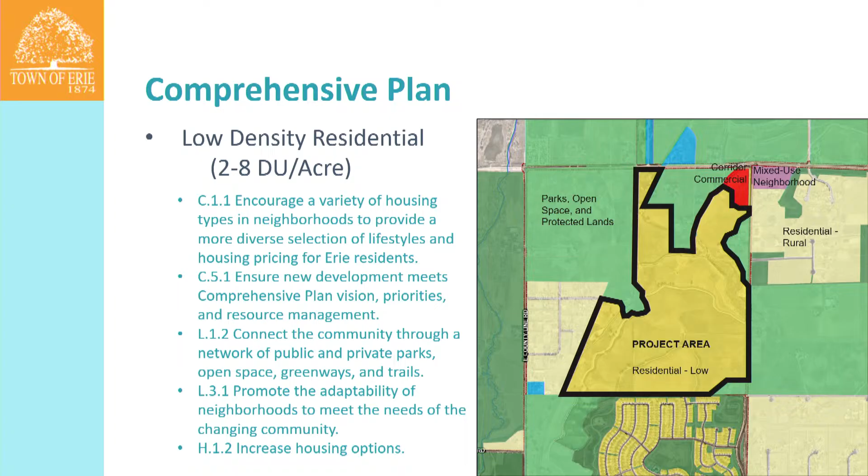Zoning-wise, as I mentioned, the zoning here is specific to Spring Hill PD. However, that zoning is fairly comparable to a low density residential type zoning.

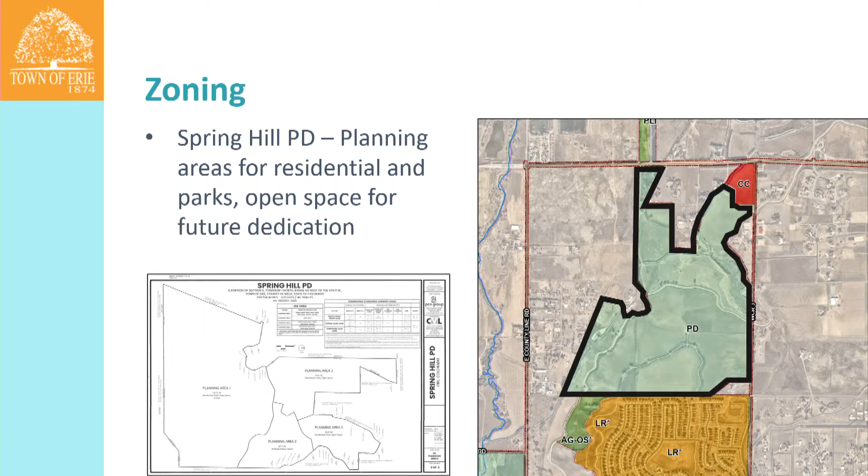Let's go over some of the key facts here. This is 300 acres total, 632 lots, breaking down into 414 single family detached, 148 duplex, and 70 townhome lots. The minimum lot sizes from the Spring Hill PD are just shy of 5,000 square feet for single family dwellings, just shy of 2,000 for duplex, and just shy of 1,500 for townhomes. These lots are consistent with those lot standards from the PD. The gross density here is just over 2 dwelling units per acre.

There are a lot of tracts here, and those tracts serve a variety of purposes including utilities. Some are for open space, some are alleyways, landscaping, and drainage, among other things.

In total, there's about 44 acres of new public right-of-way that will be dedicated. This proposal also includes a school site, a future dedication to SVVSD, just shy of 11 acres.

In total, 35 acres of public open space would be dedicated. There's also a significant amount of open space anticipated to remain in private ownership by the Metro District out here, and that's 162 acres total open space, including private and public.

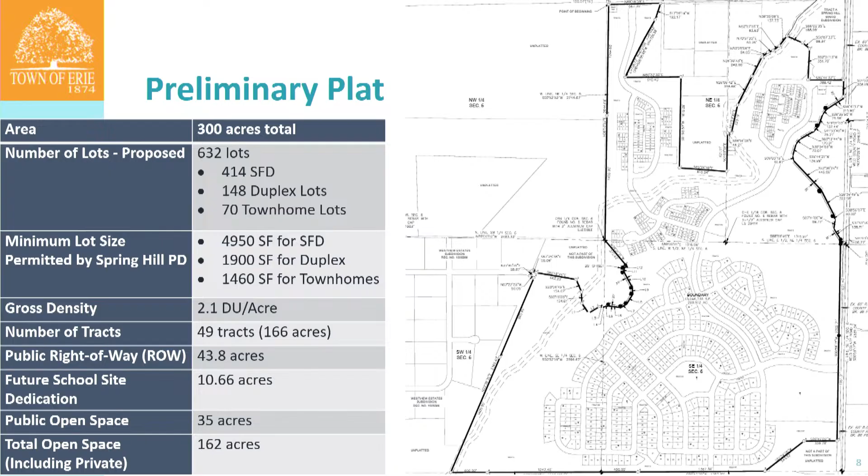In terms of access and roadways, there will of course be this new internal network of public streets dedicated as public right-of-way. Let me flip to the next slide. Key connections here - you see there will be one connection to Highway 52 to the north, and the traffic study suggests this will require some improvement.

Initially the thought was a traffic signal. I believe conversations with CDOT are ongoing - it could be a roundabout instead. I think the applicant can talk about that a little more.

The circle here is a nearby regional intersection, or off-site intersection, at Highway 52 and Weld County Road 3, which is currently stop sign controlled. That is planned, in alignment with CDOT plans, to become a future roundabout.

Developer contributions to that improvement would be worked out and negotiated through the development agreement at the final plat stage. There are also 2 planned connections to Weld County Road 3 on the east side, planned to be stop sign controlled and full movement. And there is one planned connection to the south down into Morgan Hill.

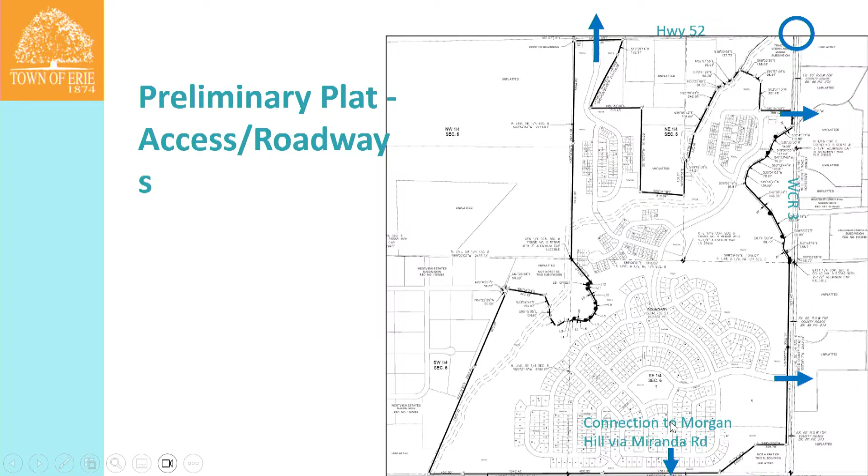Let me just make sure I didn't miss anything on this previous slide. Okay.

In terms of parks, trails, and open space, the applicant is exceeding the minimum required dedication for pocket parks. As you're probably aware, there's already the Morgan Hill Neighborhood Park to the south here. Our Parks and Open Space team determined that a new dedication of another neighborhood park was not desirable or needed, and instead fee in lieu would be the best way to proceed.

That fee in lieu would be collected at final plat. Community parks are always collected via impact fees. Open space, as mentioned, the public dedication will be just over 35 acres, and there is also a significant amount of private open space that would be preserved out here as well.

This map is probably a little hard to see on your screens. The pink line here is the extension of Spine Trail, which follows the perimeter. There are also a number of drainage and irrigation ditches out here that will remain, and the trail will be parallel to the ditch in a lot of these cases - that's part of the curvature you see there.

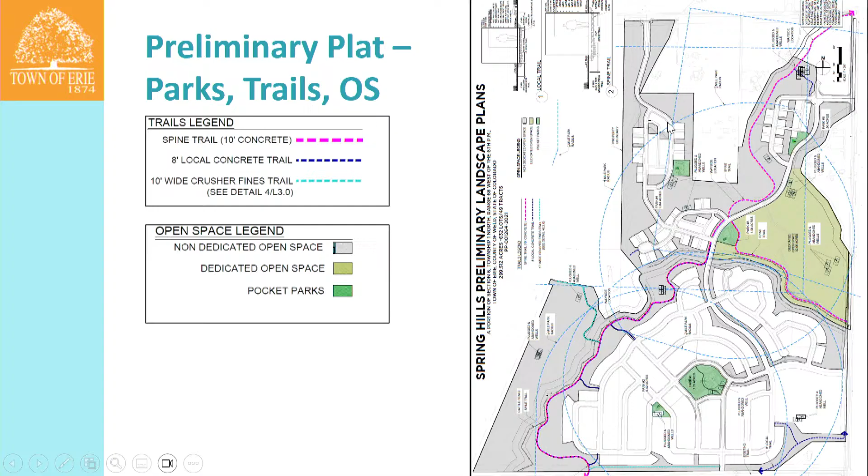There are oil and gas facilities out here, all of which have been plugged and abandoned. This application has been in the works for quite a while - it originally came in in 2021. So legally, they're obligated to abide by the oil and gas standards that were in place at the time they first filed their application.

This map is probably hard to see at this scale, but the shaded yellow boxes reflect our current standard, which would be a 50 by 100 box. That's meant to show that the setback applicable from 2021 would be a 25-foot setback from plugged and abandoned facilities. However, in most of these situations, a 50 by 100 setback would also work, because many of these facilities are at the perimeter of the developed area, in open space, or in some cases roadways.

There is some ongoing mitigation work in the northeast corner of the property. The applicant can talk about that as well, but they've been working with the state agency COGCC on cleanup because some soil contamination was identified. That would need to be completed before approval of the final plat. The arrangement of lots in that northeast corner is planned in a way to allow plenty of room for that mitigation work to happen.

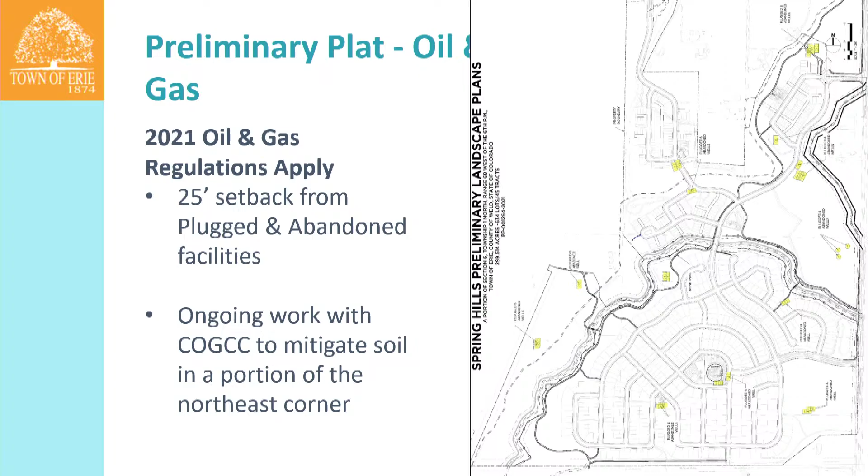In terms of impacts on the schools, one important thing to note is that the building capacity listed, the bottom leftmost number in this table, does not reflect the added capacity coming from the new high school currently under construction in Frederick. That will benefit this project since it's not far from that new high school, and will help alleviate some of the overcrowding we've seen at Erie High School.

As I mentioned, this blue site here is going to be a dedicated school site for SVVSD. I believe it's planned as an elementary school, but we don't have any concept plans for that site at the moment beyond very initial thinking, because I think SVVSD is not in a rush to build that school right now.

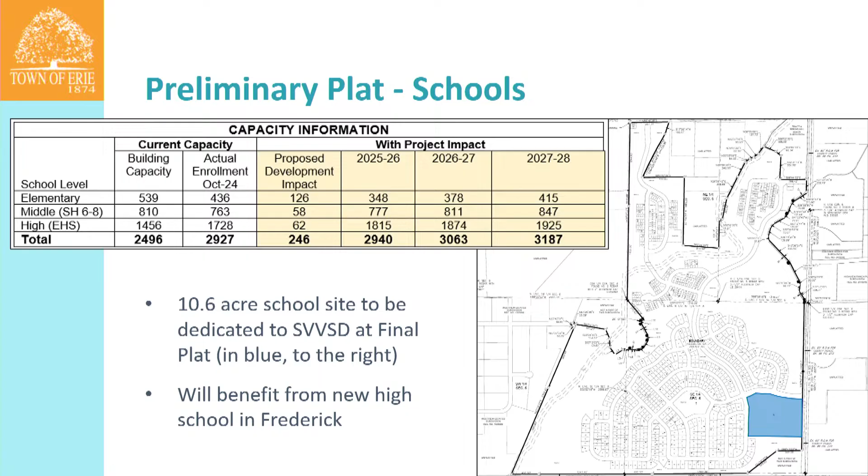Now I'll get into the approval criteria a bit. As I mentioned, staff do find that this preliminary plat is consistent with the comp plan. It matches up with the low density residential designation and hits some of our other more specific goals. It is also consistent with the Spring Hill PD zoning document.

Staff also find that this development keeps a lot of, in particular, wetlands. Of course, those would be harder to develop anyways, but they are set aside and will not be developed. I think staff find that helps mitigate some of the impacts to the environment.

These criteria will be addressed at the final plat stage through the construction documents. We review things like best management practices for water quality and erosion, and those come into play in enforcement during construction. So we anticipate those will be a component of the construction documents when we get to that stage.

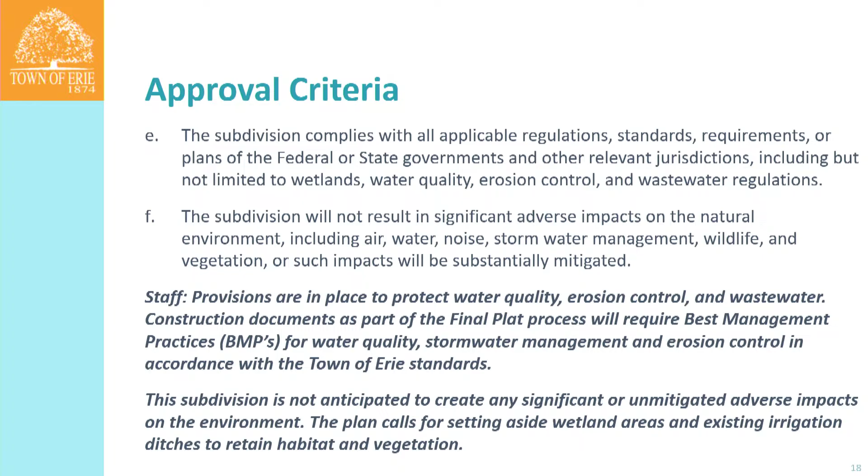In terms of pedestrian and vehicle access, staff do find that there is a pretty extensive trail network proposed, and thought has been given to how pedestrians and bikes would connect throughout the neighborhood and to key facilities such as the community center and the school site.

All oil and gas facilities have been plugged, and as I mentioned, there is additional cleanup work happening at that one specific location, but that will be completed before approval of the final plat.

Staff find that there are adequate services and facilities currently, or that will be improved through this project. Of course, as I mentioned, this project went through pretty extensive review with CDOT, also the school district, and some of our other partner agencies.

Phasing is not completed at this time, but that may come as part of the final plat and development agreement. Because this project spanned a number of years, the applicant took a few actions in particular with the neighborhood meetings. There were a couple of neighborhood meetings, both virtual and in person. Back in 2021 we were still in a post-COVID time, but the applicant voluntarily held another neighborhood meeting last month in March, and has done some other more informal interactions with nearby property owners, as well as an on-site tour.

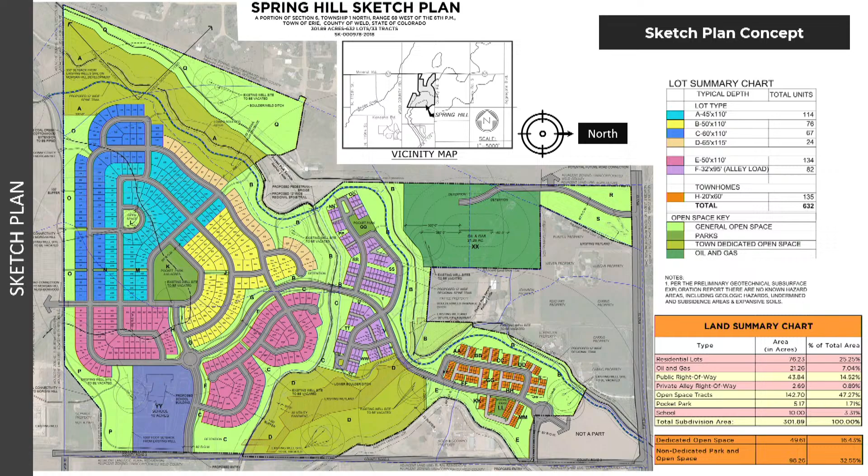So I wanted to bring you back a little bit. This slide shows an overview of the sketch plan concept from 2019, showing the general layout and integration of residential areas with open space. Over the years and through various refinements of the preliminary plat, the on-site design has largely remained consistent. One thing I want to point out that is a significant improvement from the sketch plan to the proposed preliminary plat is the removal of the previously planned oil and gas operation area depicted in this previous sketch plan. To be clear, with the preliminary plat proposal, that area has been removed. There will be no more oil and gas operations on this property with this preliminary plat.

So this is just a more graphic version of the PD zoning, organizing the different residential areas as well as the dedicated open space and off-site commercial area of Spring Hill.

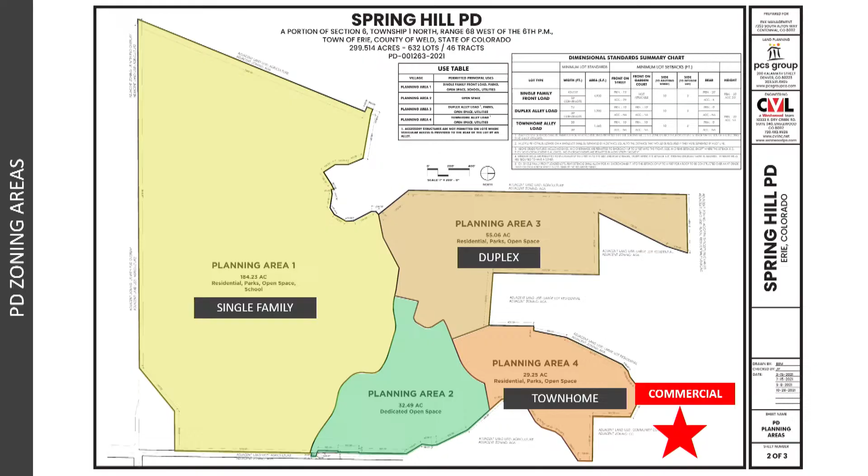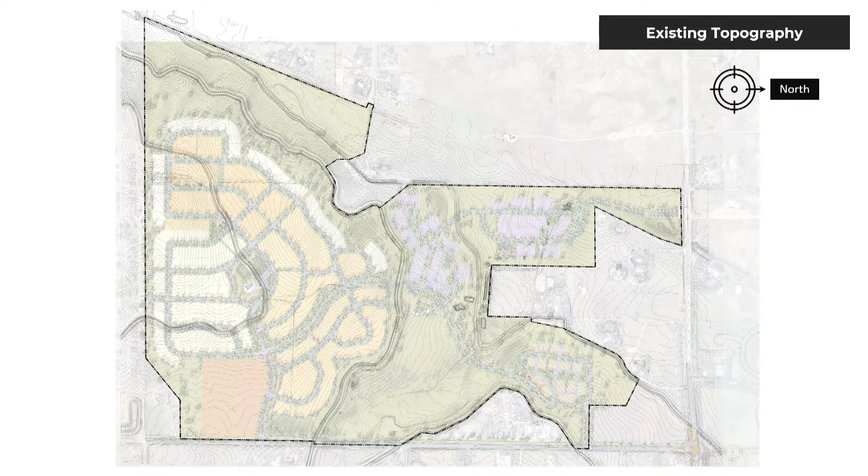So these next few slides just touch on some key analysis of the property that have informed our design decisions. This slide depicts the existing topography for the property with the proposed design underlaying it. In general, the property is gently rolling, with a soft ridge. I should point out north is now to the right for all of these slides because it gets very small if north is to the top. The property has a soft ridge that runs north-south approximately at the midpoint of the property, and then the topography falls both to the east and west from that ridge.

There are 3 existing irrigation ditches that bisect the property: starting from the south, the Coal Creek Cottonwood extension, then the lower Boulder ditch, and finally the Boulder Weld drainage ditch. One thing to note is that the Coal Creek Cottonwood ditch also runs through the adjacent Morgan Hill community. It's being piped through a portion of that community as well as it will be in this community.

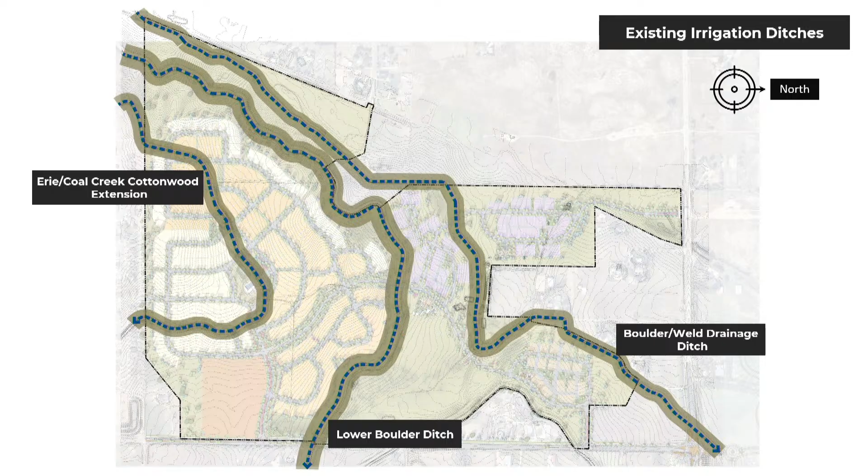Approximately at the midpoint of the property on the south side, there are really fantastic mountain views. We've actually located a park in that location because of the views and the prominent location.

As Harry mentioned, there were a significant number of oil and gas wells on the property. This slide shows the locations of the wells. Again, all the wells on the property have been plugged and abandoned. We do understand after talking with our adjacent neighbors that not all of the reclamation has been completed, and we will continue to work with the operators to make sure that work is fully completed.

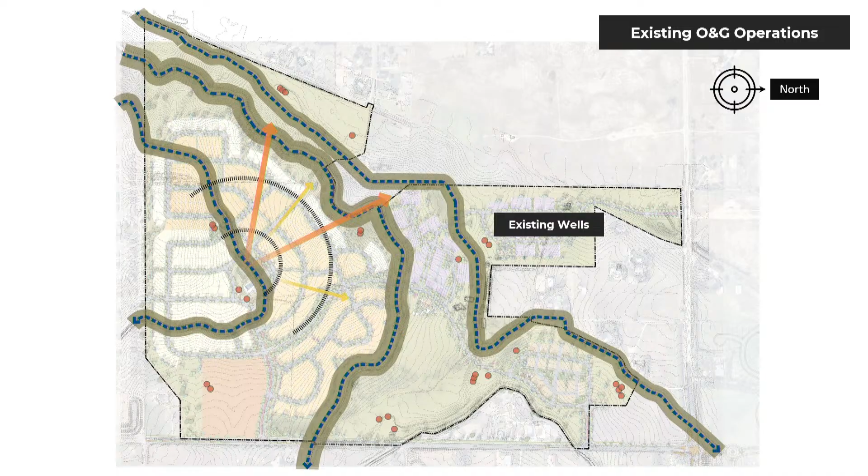There's an existing wetland on the property that has been identified and preserved within our design, integrating this natural feature into the community's open space network. At the request of the town, this area will be dedicated to the town.

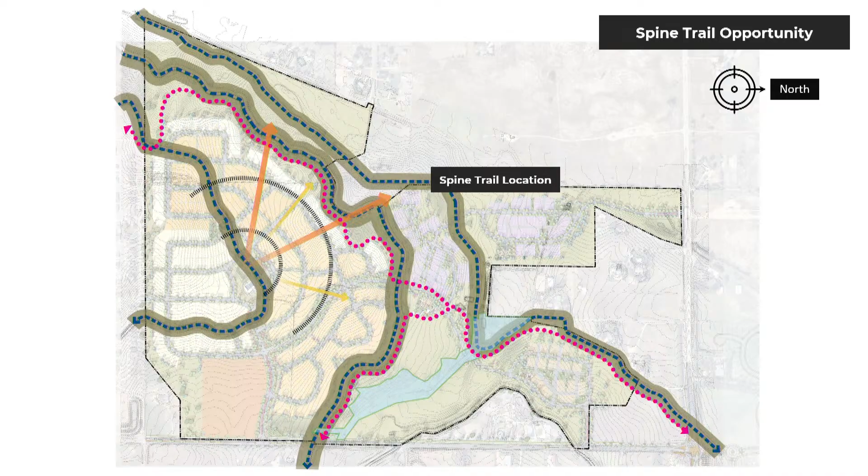Finally, this map highlights a crucial element of our community concept: the spine trail extensions and connections. Together with the town, we've envisioned a comprehensive trail system that takes advantage of the natural corridors and provides extensive connectivity throughout the development and to the broader Erie community. The next slides depict our community concept.

As I mentioned, this has been a really long process, and I want to briefly highlight the iterative process of the submittals, which I think really demonstrates our responsiveness and dedication to getting this project right. From the initial submittal in March of 2020 through multiple rounds, we've addressed every comment and worked closely with town staff and other agencies. As an example, the first submittal alone led to over a year of addressing comments related primarily to regional traffic, off-site traffic, and regional drainage considerations. Each subsequent submittal incorporated further refinements and solutions.

Interestingly, the on-site design has not changed significantly throughout the design process. The ownership team has been working on getting all the oil and gas removed from the property, responding to off-site drainage requirements, finding and gaining approvals for an off-site drainage channel that benefits the larger area, and working with CDOT.

In the sixth submittal in August of '24, we addressed some really minor comments, and then we prepared an alternative site design that moved roads and adjusted lots modestly. We worked with David Franks from the town's oil and gas team to bring this proposal to align with current town code, as well as incorporating design elements like the roundabout at Highway 52 and County Road 3 based on discussions with the town's engineering department.

The seventh submittal in July of '25 triggered new transportation comments, which we addressed without the need for another formal submittal. I want to acknowledge that and thank staff for their flexibility and ongoing coordination. In summary, while this has been a very long process, the primary delays were related to off-site design and agreements needed to solve regional issues, not a lack of effort or responsiveness.

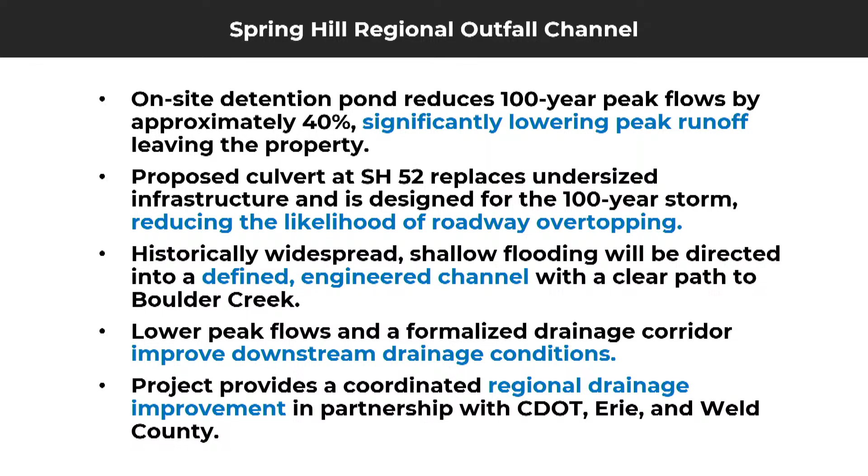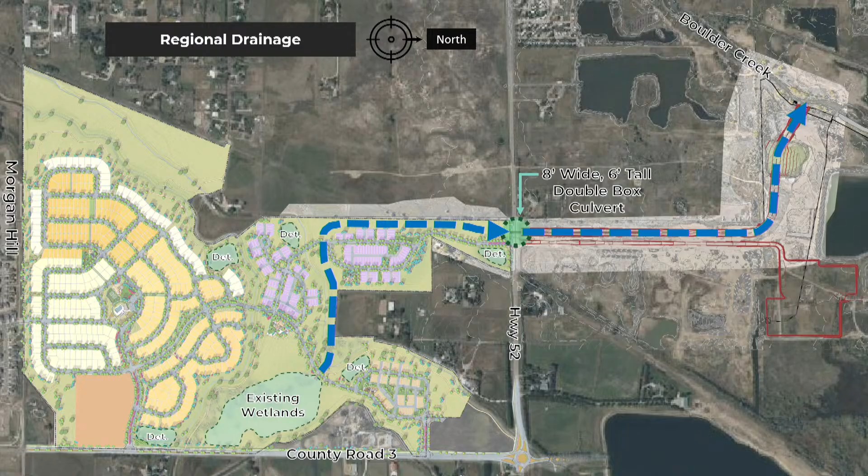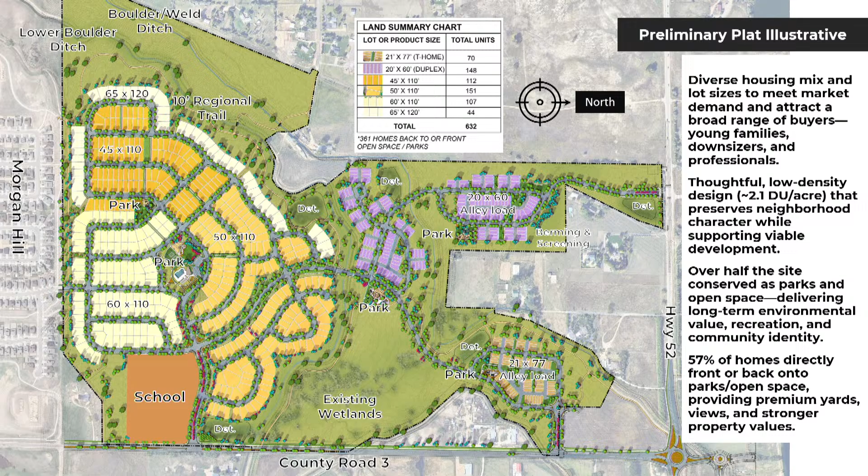A key highlight is our commitment to open space. Over half the site, 162 acres, is conserved as parks and open space, delivering long-term environmental value, recreation, and community identity. Another element is that 361 homes, or 57% of the homes in the community, directly front or back onto parks or open space, providing premium yards, views, and stronger property values for residents.

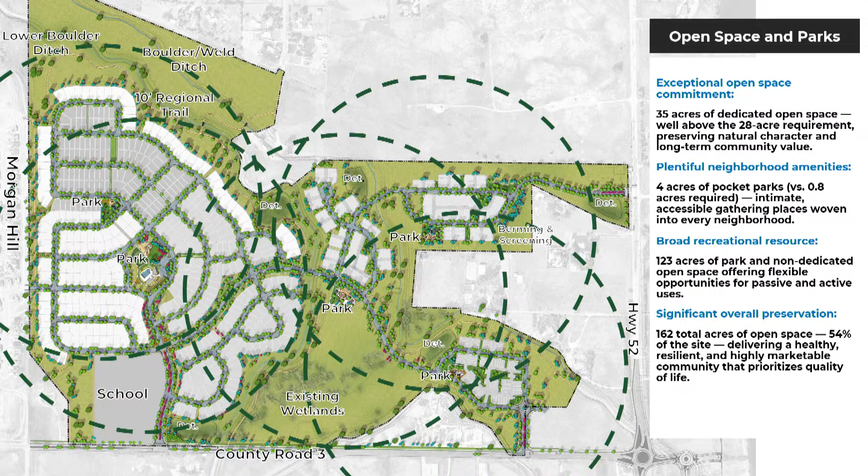Overall, Spring Hill offers a significant recreational resource with 123 acres of parks and non-dedicated open space, providing flexible opportunities for passive and active uses. This significant preservation of 162 acres, or 54% of the property, is about delivering a healthy, resilient, and highly marketable community that puts a premium on quality of life with significant park and trail opportunities.

Our commitment to an active, connected community can be seen in the trail system. We are proposing nearly 5.5 miles of total trails across the site, including a significant amount of town spine trail, about 1.9 miles, which will be a community-defining amenity providing recreation, connectivity, and property value.

In collaboration with our neighbors to the west, we are providing a bridge and trail connection so that our neighbors to the west have access to the overall trail network. We also have connections within the community with 3.6 miles of local trails weaving through the neighborhoods to promote walking, biking, and safer routes to parks and school sites.

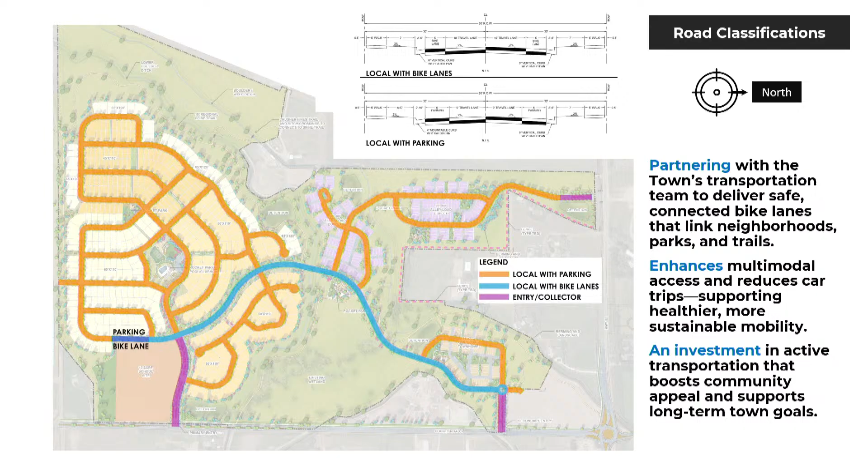We've collaborated closely with the town's transportation team to deliver a safe, connected road infrastructure, including dedicated bike lanes that link neighborhoods, parks, and trails. This design enhances multimodal access, supporting healthier, more sustainable mobility, and represents a significant investment that boosts community appeal and supports the town's long-term goals.

Finally, on traffic, another key collaborative solution identified is the roundabout at Highway 52 and County Road 3, instead of a traffic signal. At the request of CDOT, our team coordinated with CDOT as well as neighboring developers to accommodate this request.

Roundabouts are planned to improve safety and traffic flow by reducing conflict points, calming speeds, and minimizing long-term accident risk. They're cost-effective and durable, with lower long-term operations and maintenance compared to a signalized intersection.

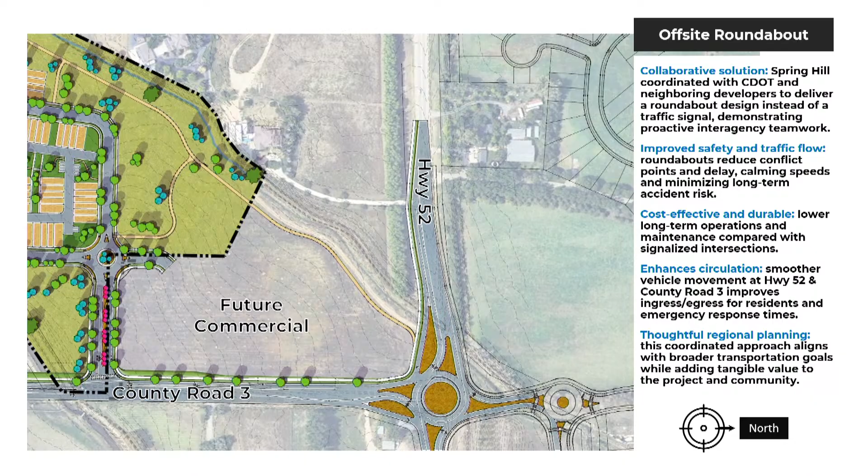As part of the design process, we build the community as a computer model to review the design. We've put together an animation to highlight certain areas of the community, so I'll just let this play. It's about a minute and a half or so.

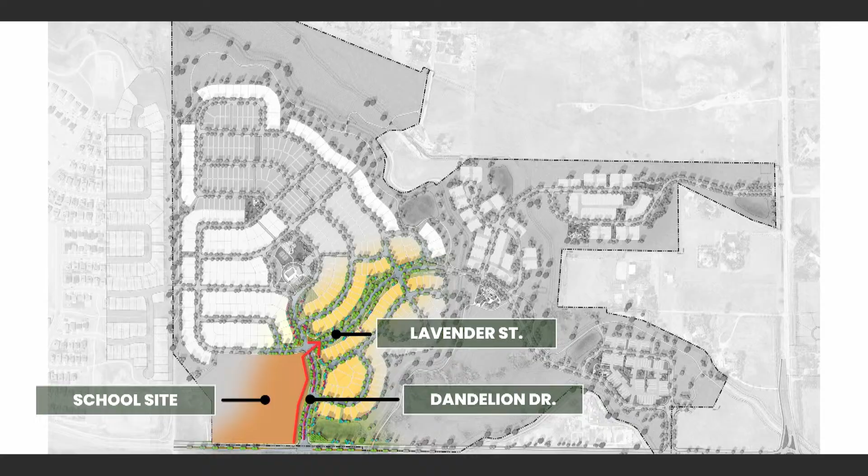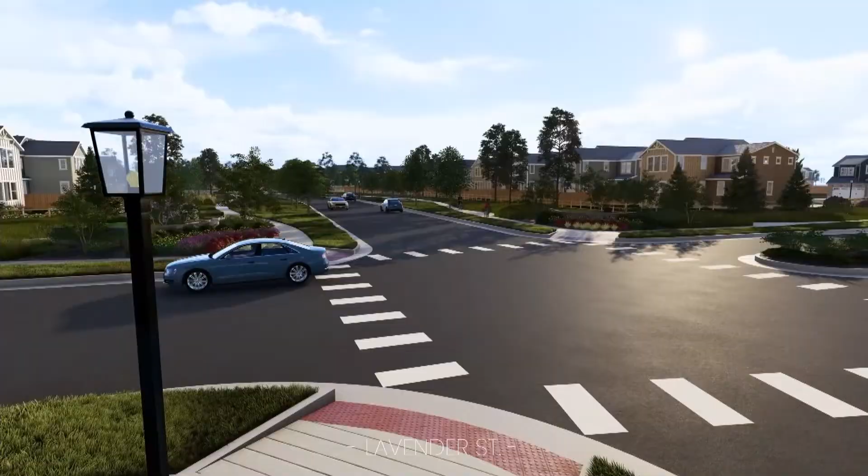So this is the entry road coming up towards our park site. We've started to change out a lot of the grass to native seed, trying to get into the xeric mode, even though we're just at preliminary plat. You can see a lot of the detached meandering walks, a little bit different look, with open rail fencing along the backs.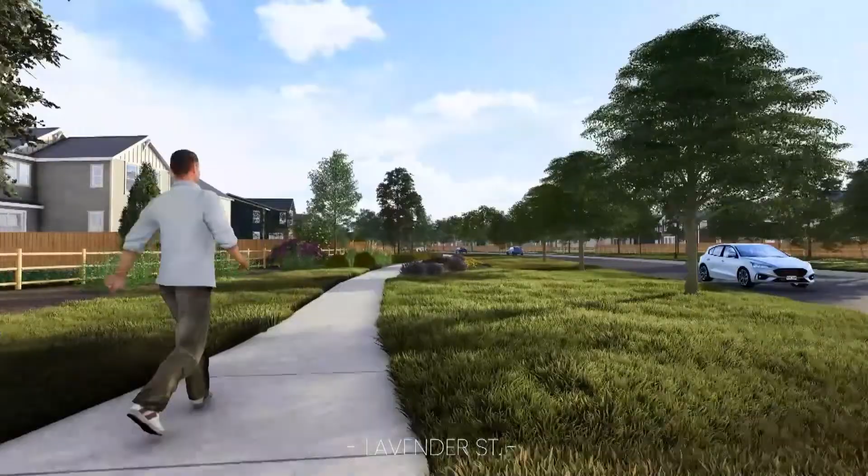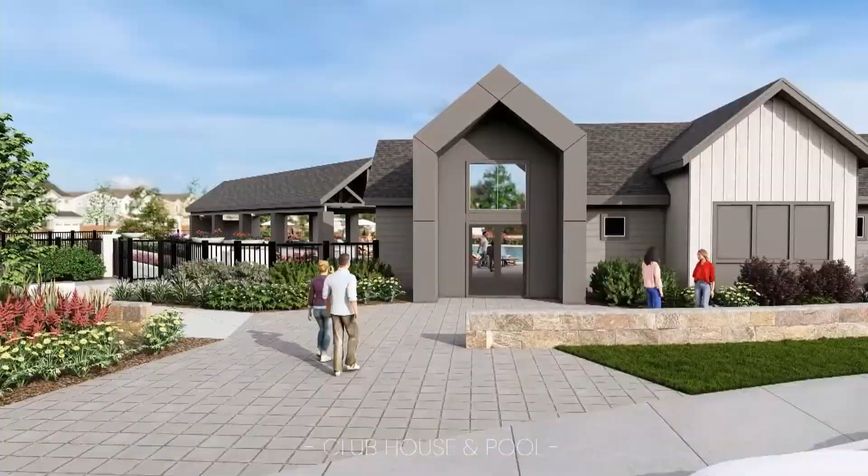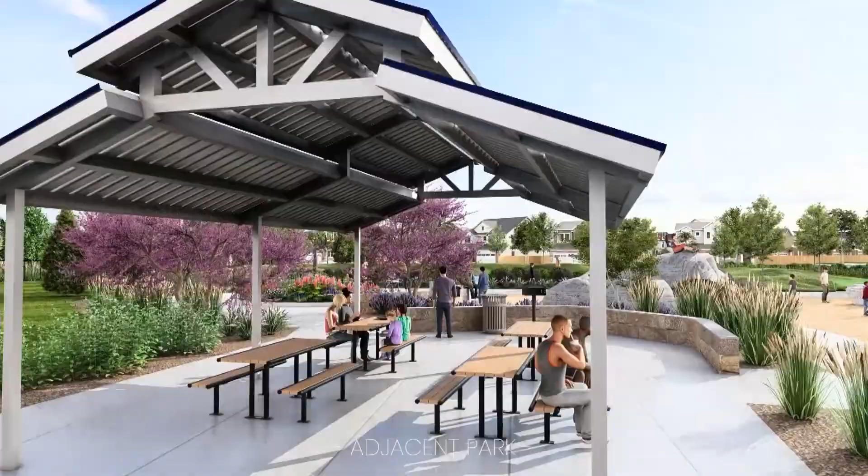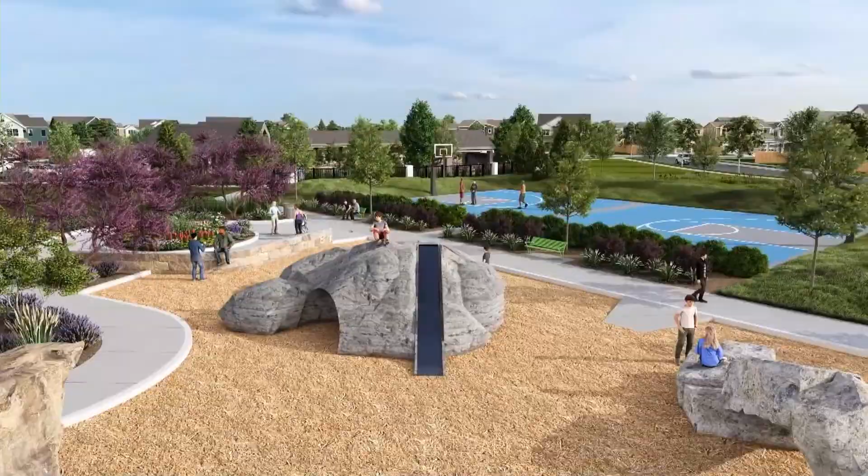Even though we don't have a neighborhood park, the combined pocket park and poolside area is getting close to 5 acres in and of itself. We'll kind of fly through two of these other pocket parks and then follow the trail alignment a little bit, and we're done.

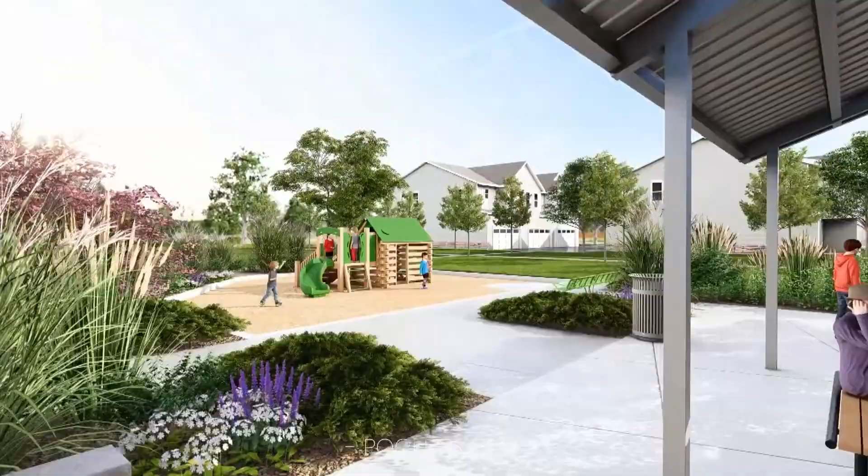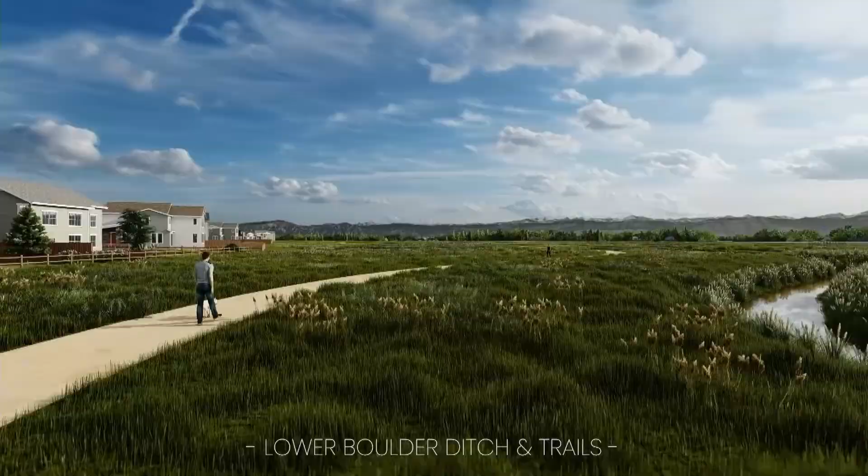So this is part of the spine trail heading to the south at this point.

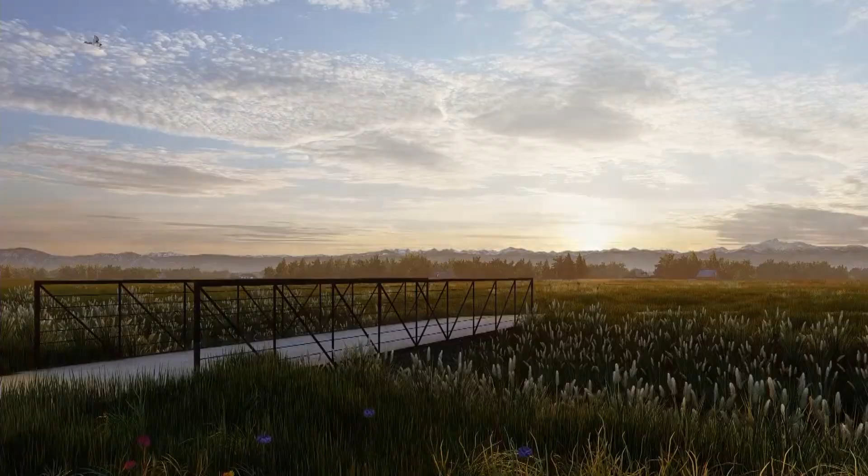To summarize, we think Spring Hill is a thoughtfully planned community that fully meets the requirements of the town of Erie. The overall project is a little over 300 acres, proposing a maximum of 632 homes, approximately 2 units per acre. The community concept proposes approximately 162 acres of open space, about 54% of the property. We depict about 5.5 miles of trails, including 1.9 miles of spine trail. The proposal meets the requirements of the comprehensive plan, as well as zoning.

The preliminary plat has undergone a rigorous review with staff and outside referral agencies. All issues have been resolved, and staff has recommended approval based on their analysis of the approval criteria. With that, we're happy to answer questions.

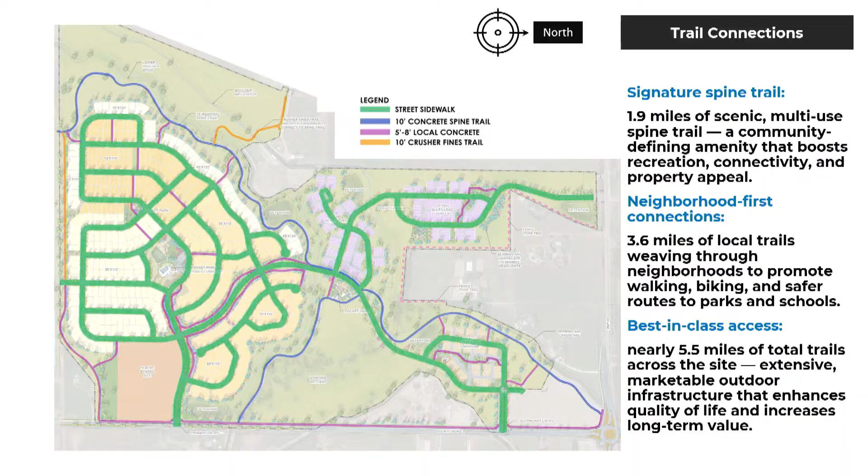Is it on their property or on your property, just out of curiosity? If it goes on our property, it'll have to be on our plans. If we put it on their property, which is kind of the conversation we're having, then it would never show up on our plans. And the maintaining open space areas, protecting drainage and irrigation - they're concerned with anything that comes close to their properties, and we're making the commitment that any private open space is maintained by the Metro District.

Anything else? If not, the time is now 7:49, and I'm closing the public hearing and moving into commissioner deliberations. Open the floor to the commission - anybody want to start?

Commenting on this whole Highway 52 issue, this is possibly the worst traffic impact study I've seen in terms of level of service projected - F's up the board, E's around, when we usually see C or D at the worst. That is exactly what the issue has been on 52. I applaud the applicant for working with CDOT and for helping with staff in trying to approach CDOT on this, because we've been trying for years to get that widened. There are so many accidents, many fatal, because of the lack of widening and infrastructure there. I do have concerns also about the roundabout on 52, but that is not up to us, it is not up to the applicant - it is completely on CDOT.

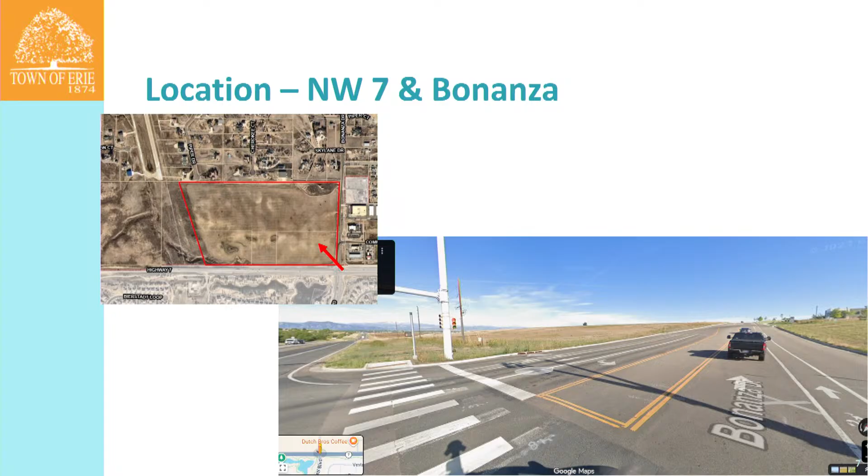There's another view looking into the site from that same location. This is looking pretty much directly west with Bonanza going north and Highway 7 going west. There's another view, this from higher up on Bonanza, a little north of Highway 7, looking directly west into the site.

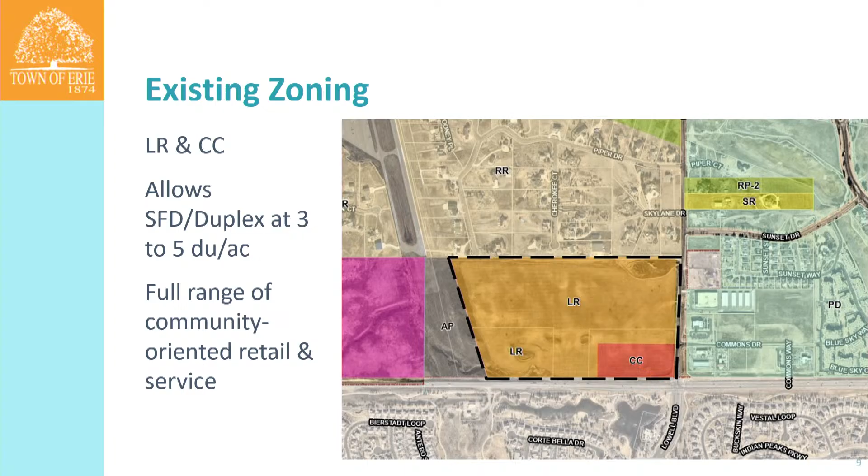The existing zoning of the property you can see on the screen is low density residential, and there's also community commercial on the southeast corner. The LR zoning would allow single family detached or duplex at 3 to 5 dwelling units per acre, and the community commercial would allow a full range of community-oriented retail and service uses.

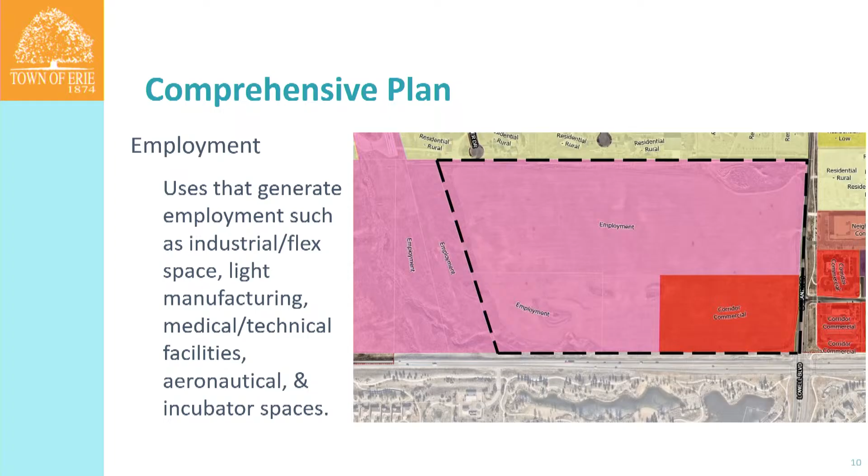The comprehensive plan designates a majority of the site as employment, and also corridor commercial. The employment uses are broad, such as industrial, flex space, light manufacturing, medical, technical facilities, aeronautical, and incubator spaces. The employment use does allow residential, though it's supposed to not detract significantly from the primary employment-focused intent, but it would allow some. Any residential they propose would be in keeping with the annexation agreement.

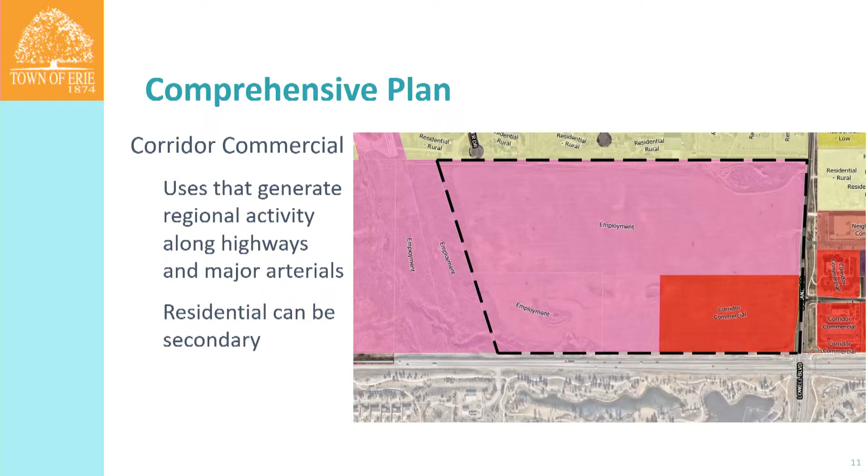The corridor commercial are uses that generate regional activity along highways and major arterials. Residential can be secondary.

There's a variety of comprehensive plan policies that the proposal would hit. It includes a mix of housing types to encourage variety and activity centers for residents, making sure new development meets comp plan vision and priorities, encourages infill development, promotes mixed-use neighborhoods, diverse housing opportunities near employment, cultivates a mix of local and creative businesses, potentially expands use of the airport as a community resource, and locates higher density housing in mixed-use development areas served by transit.

So here's the applicant's proposal. They are showing an area of AP, or airport, on the northwest of the site, consisting of 15.9 acres. There's community mixed use in 2 areas, tracts B and C. The one on the northeast is 26.1 acres, and the one along 7 to the south is 18.4 acres. Airport use allows related commercial uses such as restaurants, offices, or general retail.

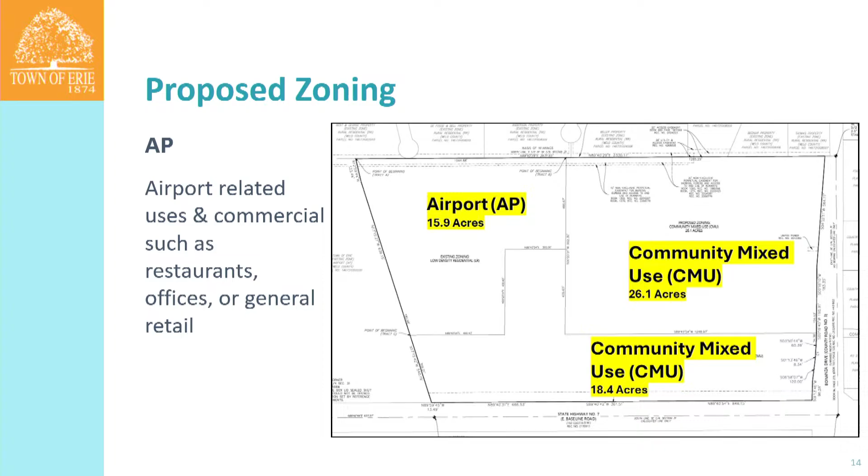The community mixed use, when they're of a certain size like these, must have a certain number of principal uses. If it's up to 20 acres, they have to have at least 2 uses. Over 20 must have 3 principal uses. One of those uses in each case must be residential. And each of the different uses within those categories must have at least 25% of the gross floor area distributed among them.

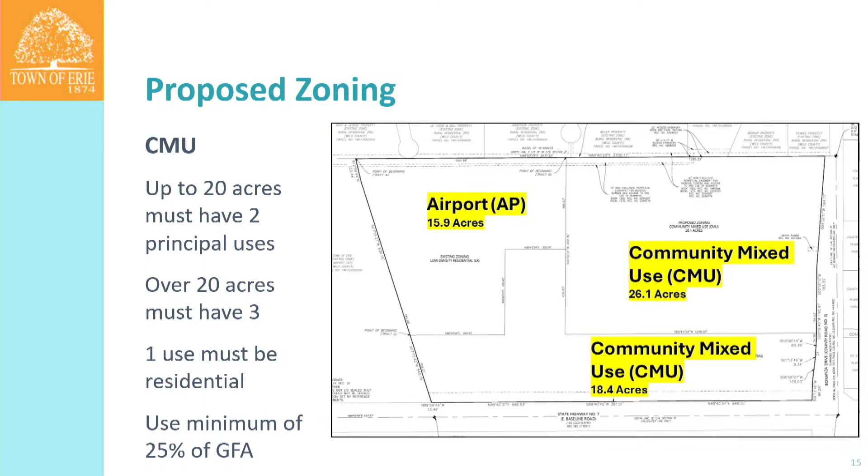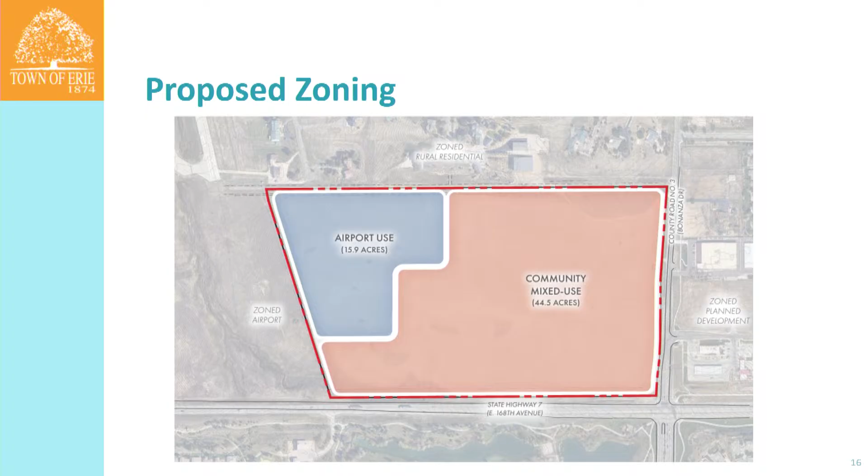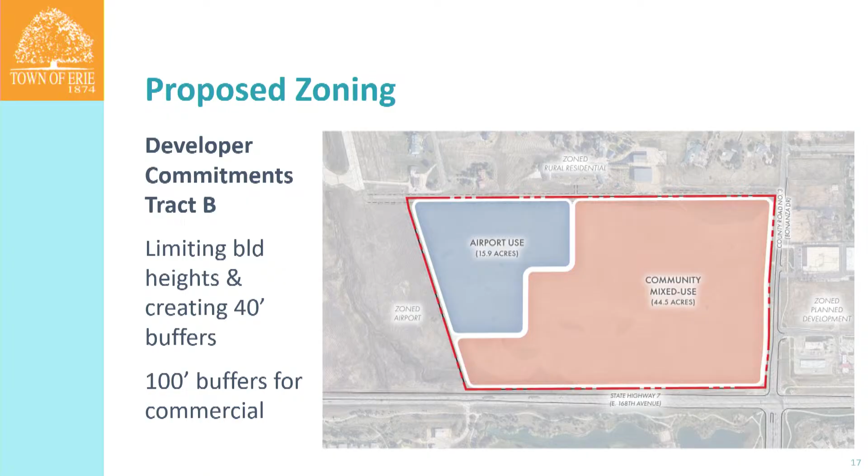We would note that the developer has provided several commitments. These are private commitments they've made, not zoning requirements, and not necessarily enforceable by the town. But they have said they would limit building heights, create 40-foot buffers, and 100-foot buffers for commercial relative to residential uses. So the idea is they're committing to keep things, especially in the north end, to a more reasonable scale compared to what's developed next to it.

So these are the approval criteria that we review rezonings against. I've detailed them in the staff report, so I'll just briefly go over those. There's general promotion of public health, safety, general welfare, consistency with the comp plan purposes of the UDC, and having adequate facilities and services, streets, transportation, water, gas, utilities.

I would note on the transportation, the applicants did submit a detailed traffic study. We reviewed it back and forth quite a bit. There are still a lot of outstanding issues that would be expected to be addressed at future applications with platting and site plans once those come in. But our transportation department reviewed that extensively.

It's not anticipated to result in significant and adverse impacts to the environment and surrounding area. It's not likely to result in significant adverse impacts on other property. Future uses would need to be compatible in scale. Rezoning is generally consistent with the town's economic development goals and objectives to bring positive growth to the town.

So we do find that the application complies with the approval criteria and recommend the Planning Commission adopt the resolution recommending the Town Council approve the Sierra Vista rezoning to airport, AP, and community mixed use as shown on the zoning map. The applicant did hold a neighborhood meeting last year in the fall.

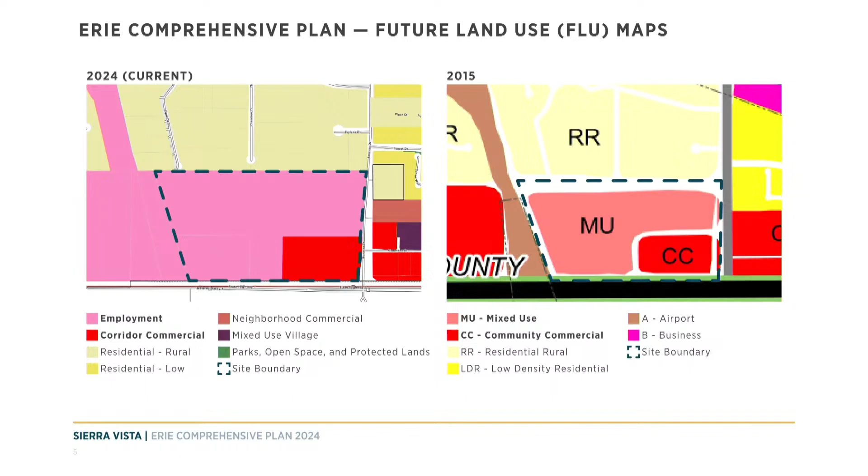Oh no, that scrolls. There were two districts similar to today. The biggest difference from what you'll see from 2015 to 2024, which is the current comp plan on the left, is the nomenclature changed a little bit from mixed use, MU in the pink, in 2015, and community commercial, to employment and corridor commercial. So a little bit of nomenclature change. I think with all intents and purposes, the employment designation sort of has the same form and function as what used to be mixed use. So you heard a lot of that in Chris's presentation as well, and some of the uses that we're presenting.

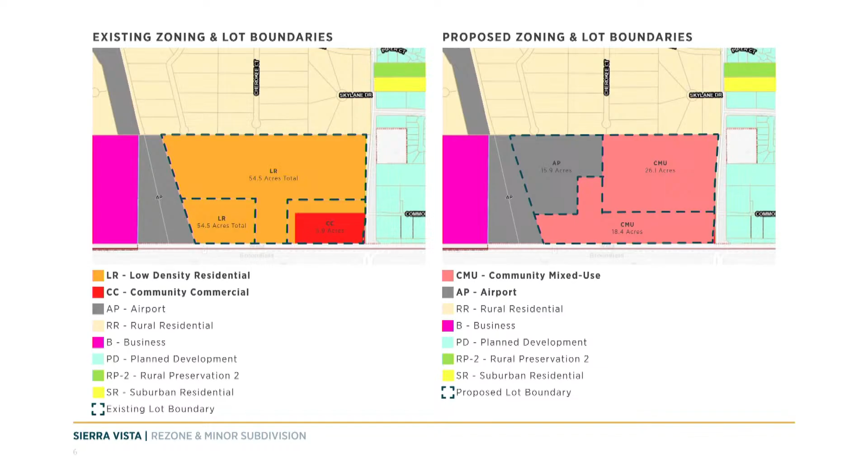I do want to point out in the existing zoning with the LR, low density residential, that does not necessarily comply with the comp plan. Low density residential only allows for single family and single family attached residential, which by no means is employment or in any way mixed use. So we believe that the rezoning proposed here, as Heidi mentioned, further buffers the airport, the active runway on the west, in addition to the CMU district, which allows for corridor commercial and employment in that zone, is a more proper zone category for the property.

And then Chris already showed this graphic. It just kind of shows you everything blended into the two land uses. But in this case, we've got those uses highlighted on this slide, and it shows you the types of uses we would anticipate in an airport zone, with a variety of uses, many of which are also highlighted in the staff report by Chris, anything from general retail, restaurants, aviation support, offices, utility facilities, those types of things. Again, a very mixed use category.

And then the community mixed use zone district, CMU, which allows for the mix of uses. We do have to have 3 in the area, and then one predominant use of at least 25%. That shows you a list of the types of uses that could happen there. All together, we believe this is a more diverse plan, a better mix of uses, the ability to provide employment, retail, housing, and activity centers for the community, supporting the vision of the comp plan with a wide variety of uses.

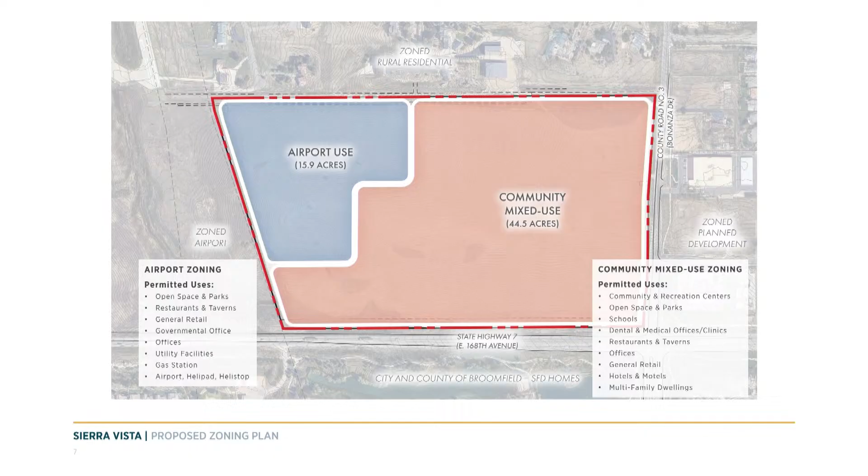And with that, I'll hand it back to Heidi. Yeah, great. Thank you, Diana.

So this slide details our application and review process for this rezoning and minor subdivision. We conducted 2 community meetings, one properly noticed, and we did conduct a second one as well. From those meetings, we had 47 people sign up, so we created a stakeholder email list from that. Because we were hearing varied concerns from the community, and there was a lot of interest—it's always stressful when a piece of property gets rezoned near yours—we decided to put together a stakeholder list of all the emails we could collect.

After that, we sent out 4 emails that included links to our resubmittals, as well as summaries of what changed in each application to help the community digest it. We also provided notification to the neighborhood and all of our stakeholders of tonight's hearing, as well as the town council hearing in the event we are approved this evening.

In addition, myself and Becca made ourselves available as much as we possibly could. The community was really engaging with us. They reached out with phone calls and emails, always very respectful, really nice dialogue with the neighbors. We appreciated the way they treated us, and we spent as much time as we possibly could talking to them.

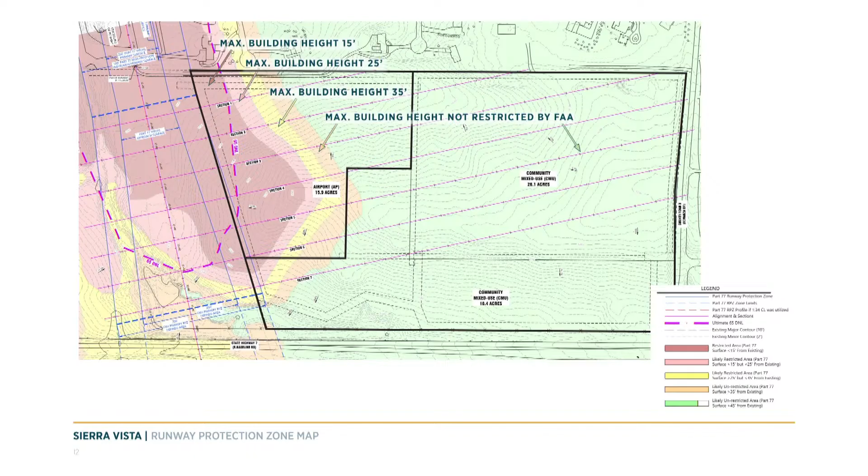Talking to the folks in the air park, we heard really reasonable concerns from these residents. They're concerned about protecting their current avigation easements—they have an easement on the north side of this property to access the airport, so we want to make sure that's always protected for them.

Because we have low-density single-family houses on the north side, they're rightfully concerned about any loud commercial use adjacent to their property that could impact their quality of life. They also expressed concerns about multifamily residential buildings nearby, wanting quality architecture, appropriate massing, and step-backs so we don't have big buildings shading their homes. Those were all reasonable concerns we heard.

So we went back to staff and worked with them to provide some notes on the minor subdivision that address these concerns—limiting height of structures, setting back commercial development, and making sure their easement is protected.

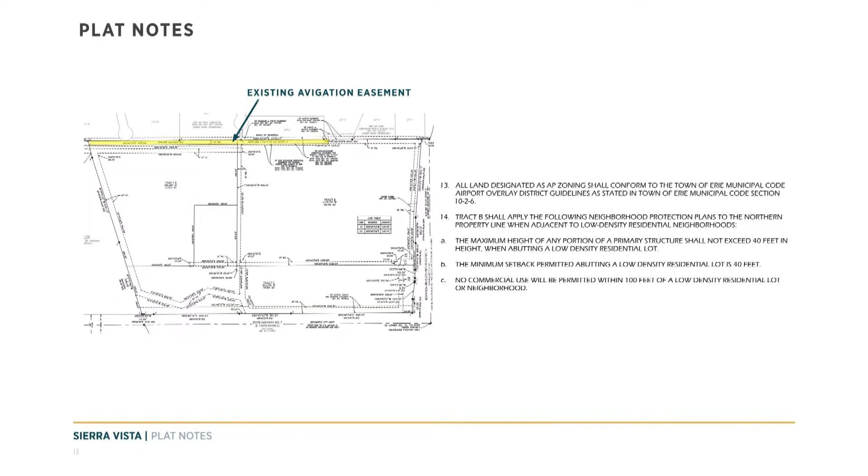We'll skip over the minor subdivision and the review criteria since Chris already did a great job with that. These are the next steps Chris also reviewed with you—it has to go to preliminary plat, then to a site development plan. Just a reminder that this is just a rezoning.

One quick thing—we got a written comment that came in late today that I want to address. This person indicated concern because staff notes say access to the site is only planned from Bonanza. I wanted to let you know that CDOT's access control plan does have an access point to this site on Highway 7.

You did hear that we did a preliminary traffic impact analysis for this site. Now, it is just a rezoning, so we don't know what will be built here. Wyatt does not have any contracts for purchase and sale on the land, and there's no designated or identified use for it yet. Without that, a traffic impact study becomes kind of challenging—you have to make assumptions.

Because the rezoning, by the UDC, requires the minor subdivision to have matching tracts, that triggers the traffic impact study. But when it goes to preliminary plat and then a site plan, you'll know what the uses are and can do a detailed final traffic impact analysis.

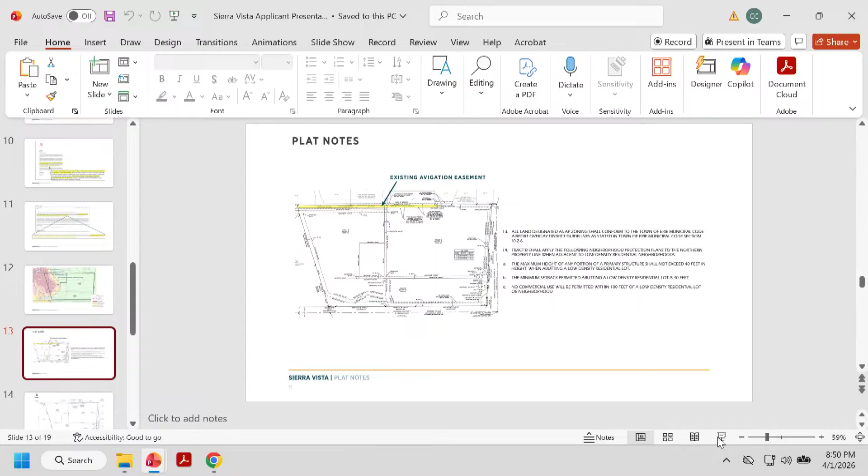Yeah, okay, so this is the easement that's on the north side of the property that's included in the minor subdivision that has - I can try. Yes, I can do that - that gives express rights to the residents of the air park. So that easement can't be removed, it can't be replaced, it will be there when this comes in for a preliminary plat as well. And then as this goes through the process of site plans, it'll need to look at making sure that all of the safety concerns are addressed.

Okay, so just to clarify, as of right now there is an avigation easement on the property. However, that doesn't mean that that is the only amount of land that is going to not be built on. There could be additional buffer required at a later date, or planned, because it is in close proximity of an avigation easement, and we want to make sure we're not having any issues with that. I think I understand now, sorry for my confusion. Correct. Yes, they can't change the easement that's already existing. It's recorded, so they can't impede that or change that, not without permissions. So that's restrictive. They've made some commitments in terms of setbacks for commercial height and setbacks for residential. And then, of course, anything on the previous slide with the colors where FAA may limit heights would have a limiting factor on development.

Okay, so now into the second part. Within proximity of flight patterns, within proximity of on-airport premises, the question is, if we are now having this as airport zoned, does that force FAA review of this development at a later date? Well, we would typically always send it that way. We send it to the airport manager, and yeah, they're in the airport influence zone, and they're referred to the FAA, any project within that area. Okay, thank you, sorry, I didn't mean to interrupt.